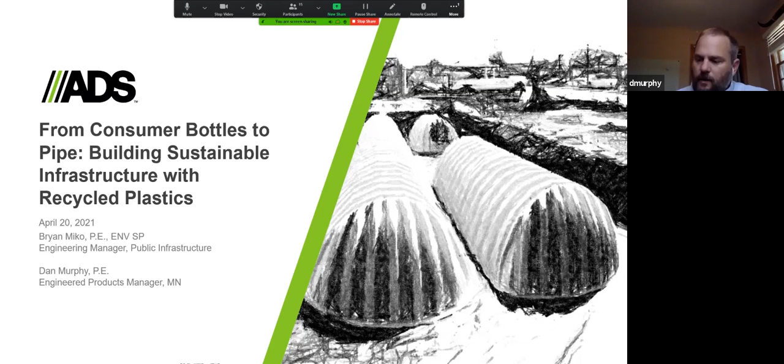I'll let you go ahead, Bryan. Thanks, and good afternoon everybody. My name is Bryan Miko. I'm an engineering manager for ADS. I work alongside Dan, primarily focused in the public infrastructure space and utility space. My background with ADS, I was a regional engineer for 6 years here, really working a lot on the material science side of things with our manufacturing processes, recycling operations, product design, R&D to come up with innovative ideas to use out in the field. I am a civil engineer by trade and licensed in 3 different states, Minnesota not being one of them, but in Illinois, Pennsylvania, and Florida. And I've done quite a lot of stormwater work all across the eastern half of the United States, so a broader perspective from my end. Dan's local to you guys in Minnesota, and he'll bring some specific perspective to the things happening in Minnesota. But I spent quite a lot of time in Rochester and in the Twin Cities and really all across the state of Minnesota, so very familiar with it and glad to be here today.

As Kevin said, our presentation is really going to be 2 parts. The first part is going to talk about some of the things that we've decided to do as a company to be more sustainable from a material source and waste management perspective. Our hope is that you get to learn a little bit about the recycling process for plastics, and learn some things about how sustainable and resilient they can be when it comes to buried infrastructure in the ground. The second part, Dan's going to focus more on stormwater management projects, a few case studies that'll highlight some of the things we can do to be creative with stormwater and how to manage it in our ever-changing climates and environments here in the Midwest. We are really glad to be here today.

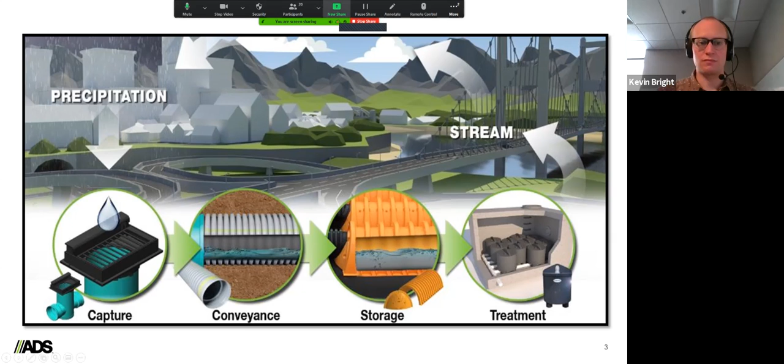Water. It's the most precious natural resource we have. Advanced Drainage Systems is keeping it that way by preserving this precious natural resource for generations to come.

Water. It's the most precious natural resource we have. Advanced Drainage Systems is keeping it that way by preserving this precious natural resource for generations to come. Our industry-leading suite of sustainable water management products is highly engineered and continuously improved to solve for the entire life cycle of a raindrop: capturing, conveying, storing, and treating. As the second largest plastic recycling company in North America, we keep more than 550 million pounds of plastic out of landfills each year, transforming everyday household items into pioneering products that last for decades. We believe in getting the job done right today for a cleaner, greener tomorrow.

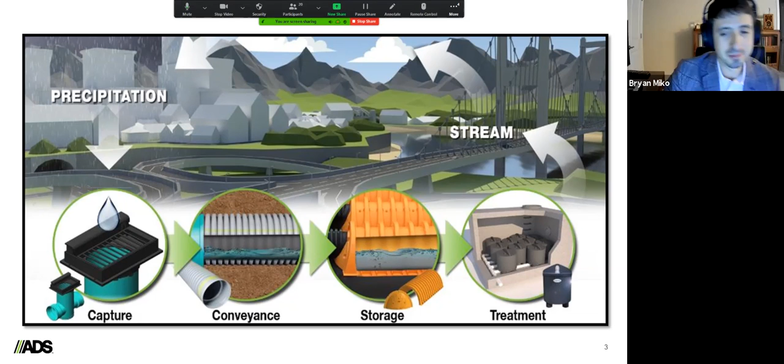Have I returned to PowerPoint here? Yes, you have, Bryan. Okay, thank you.

Now that you have the big picture in mind, I wanted to shift more towards why ADS uses plastics for sustainable infrastructure and drainage investments, and how we incorporate the sustainable use of those materials into what we do. This definition on the screen comes directly out of an inspection document from AASHTO, the American Association of State Highway and Transportation Officials, who came up with a new inspection guide for looking at drainage infrastructure, culverts, and storm sewers.

One of the critical things our drainage infrastructure does is protect our pavements, bridges, curbs, and homes from the destructive forces of water. If we didn't have drainage infrastructure, water would go wherever it wanted, finding the path of least resistance. It would erode soil away and devastate the very system we rely on to get to the destination medical center, through the city of Rochester, and really all of our cities and communities across the country.

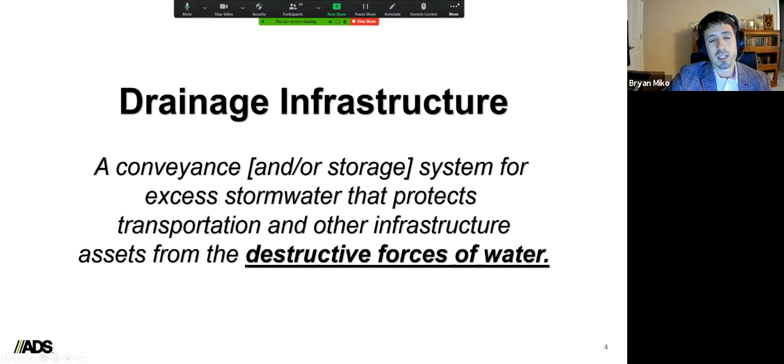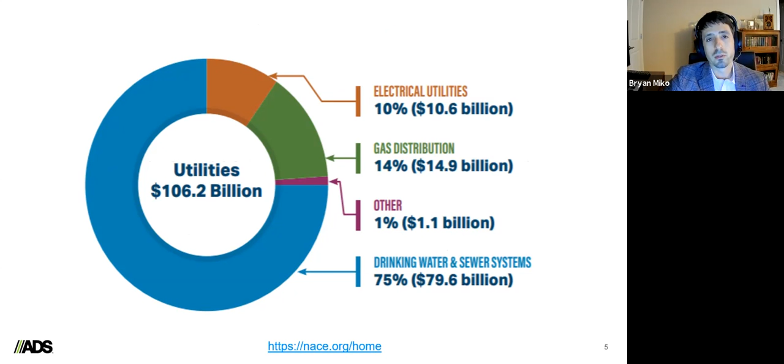Historically, our drainage infrastructure has been made with things like concrete and steel, and still is today. But we're starting to shift more towards the use of inert materials, materials that don't interact with their environment, for buried utilities like electrical, gas, drinking water, and sewer systems, because a lot of them, especially our aging infrastructure, are very susceptible to the effects of corrosion. We spend over $100 billion a year fixing problems related to corrosion with our utility infrastructure as a country.

In a more urban environment, we talk about salting agents and brines quite a lot from a sustainability perspective. We use them, almost addicted to them in some senses, to keep our roadways safe for the traveling public. It's not sustainable to have communities where human life is at risk because pavements are icy and crashes happen, but we continue to use a lot of salting agents and chlorides to make them safer.

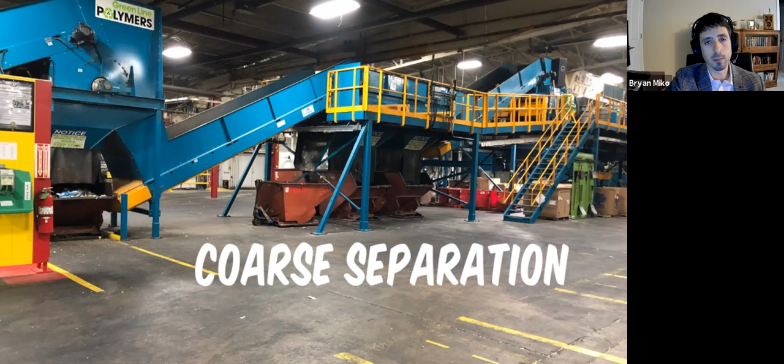The next thing we do is have a sorting team, which ranges in size depending on the facility and throughput. This particular facility is similar to Waterloo - we usually have 8 to 10 line operators on the conveyor system. They're looking down at the different types of packaging, and based on our database of knowledge and their experience, they're picking off packaging that isn't the right type of plastic - not number 2, number 1, or number 5. They throw that into the middle trough, and we keep it separate and dispose of it, either taking it to another facility that can recycle or reuse it, or unfortunately in some cases there's waste generated from that.

Bryan, can you confirm the numbers of plastic that you use? There's a question in the chat.

Sure. So we recycle number 1, which is PET, number 2 plastics, which is HDPE - that's the most reprocessable plastic, actually. You'll see in a lot of what we use, probably 400 million of the 550 million pounds is number 2 plastics. Then there's number 5 plastics, or polypropylene. Those are the three most reprocessable, recyclable plastics.

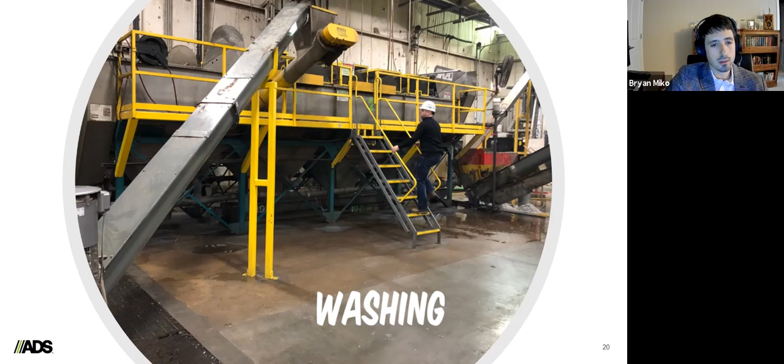...a conveyor system that squeezes out the water and actually dries out a lot of the labeling and additional contaminants, which is what you see here on the left.

On the right is what I was referring to before when I said the word flake. That's what that ground up flake looks like when we chop up the bottles and after a series of wash cycles. We usually do 2 to 3 wash cycles before it gets to this stage.

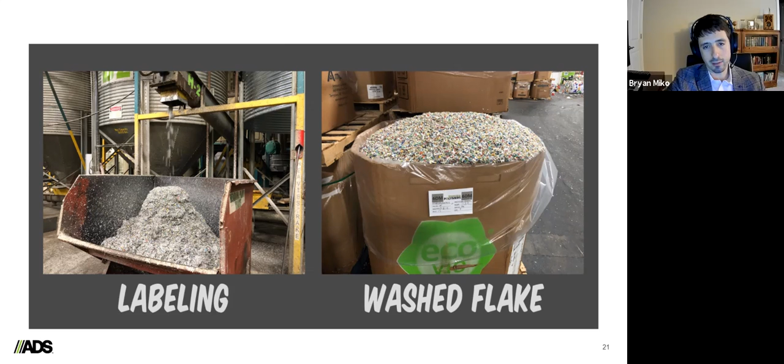I wish I could zoom in a little bit for you there, but you can kind of get a sense. Those Gaylord boxes are about 3 feet high, 3 by 3 by 3 if they were a cube. So you can see all the boxes we have staged throughout the facility behind it, and that's all recycled, washed flake and HDPE plastics.

The last critical component to making these reusable is drying them. Moisture can be very, very dangerous to the mechanical and engineering properties of plastics for future use. This is probably the slowest and most energy intensive component of our recycling process.

It's just because water is a stubborn resource and a stubborn molecule. So getting things completely dry for reuse is critical.

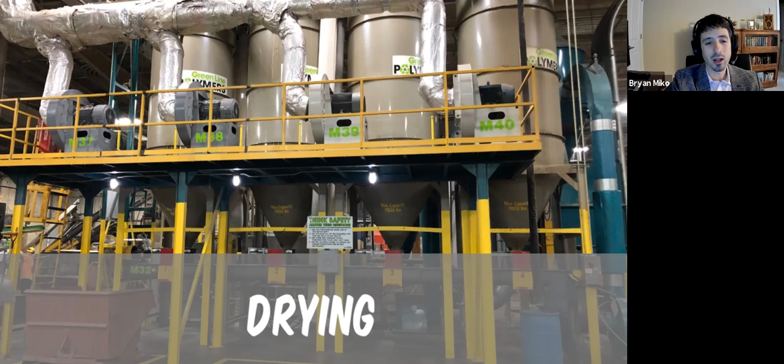After we dry that flake and make it clean and ready to go, we actually take one more step, and this is kind of a self-inflicted decision. What we found is that in using recycled plastics for manufacturing, it's actually good to do one quick melt filtration system to do one final check on the plastic before we put it into our manufacturing devices and extruders.

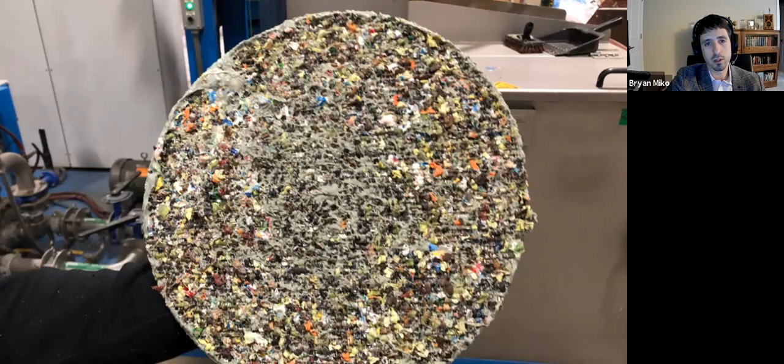So what you're seeing on the screen is actually little pellets, which I'll show in a bit, where we melt all of that flake you saw. We chop it up, extrude it, and chop it into little round pellets that kind of look like BBs. This is what one of the screens looks like at the end of one of these melt filtration devices we use to chop up and reprocess the plastic one more time before doing quality checks.

You can see that when we add this additional step, all of these contaminants were still in that bale of washed flake.

When we manufacture products, we have screens like this that catch this stuff, but it's a lot better to catch this offline before you're actually manufacturing the product, so we don't have to shut down our machine or operations, and we can keep moving and using the recycled plastic at a high output. That's an internal decision we've made, taking this step offline and doing it ahead of time.

We do a lot of quality checks on our recycled plastics. We have a database of over 2,000 different types of packaging that's come through our facility, and we do individual testing on Tropicana's orange juice bottles, Heinz's mustard bottles, and Tide's detergent. I'm using big brand names people recognize, but you can imagine the variety and variability that comes through. Every time a line operator sees a new piece of packaging, we take that and try to quantify the material properties of this plastic and how to incorporate that into our system.

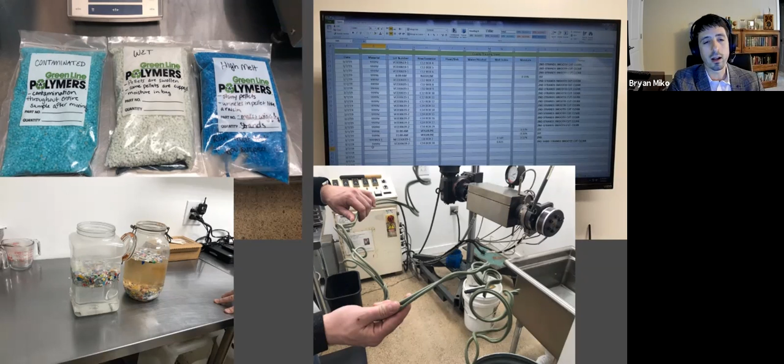We do all sorts of quality checks, like in the bottom left, what we call a float test. The far left bottle is what you'd see in the wash baths, with just water and plastics—that's the mechanism we use to clean them. On the right, we change the density of that fluid by mixing alcohol and water together, and what you see is a separation of different types of plastics. That gives us a good sense of how well we pulled out number 5 plastics from number 2 plastics, and we can use a different density fluid to quantify how we're doing from a processing perspective.

We take all of those pellets, send them out to our manufacturing facilities, and use that recycled material, that recycled waste, to develop and create buried infrastructure products for stormwater management and wastewater management. We do a lot of septic systems, rural wastewater treatment systems, sanitary sewer systems, et cetera.

There's been a ton of research, and I don't have a lot of time here—I want to leave some time for Dan—but AASHTO and national research arms like the Transportation Research Board and National Cooperative Highway Research Program have done a lot of research on the use of recycled plastics for engineering applications like culverts or storm sewers. Very recently, they have allowed the use of recycled plastics in manufacturing for use within the public right of way and on public projects by departments of transportation, cities, et cetera, with an assurance that the material will last 100 years plus.

The cool part of this story is that we're fortunate to be part of an initiative where we take things only meant to last 6 months to a year, and we repurpose them to last 100 years plus when buried in the ground, serving a purpose in handling and managing our stormwater.

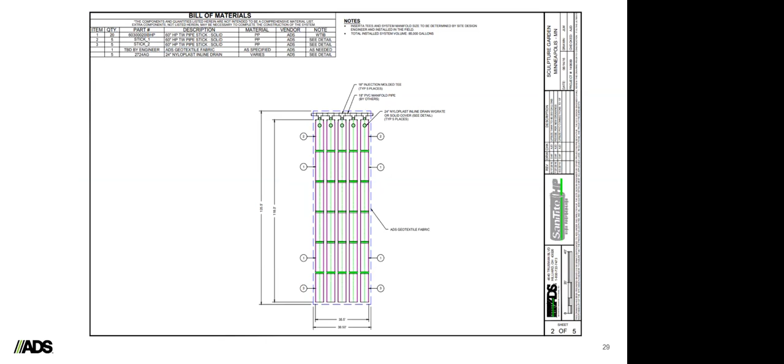So by installing, yep. Say that again, Bryan. Sorry, I was just going to say, I was wondering if you had another visual. Go ahead, I do, yeah.

We were able to give the repumped groundwater, used for aesthetic purposes, a secondary use: irrigating the grounds that were being irrigated anyway with potable city water. So not only are we saving water, but we're alleviating pressure in the storm sewer system, because most of the water is now taken up by evapotranspiration after it's applied via irrigation, instead of entering the city's pipes and flowing back out to the Mississippi River.

In the grand scheme of this project and all the improvements at the Walker Art Center, this particular piece represented a minor or small cost, but it resulted in a major improvement in the system's sustainability.

So in general, I like this project example because I think it serves as a good reminder that there are opportunities all around you to improve sustainability, and you really do need to try to make positive changes where and when you can with the means you have available.

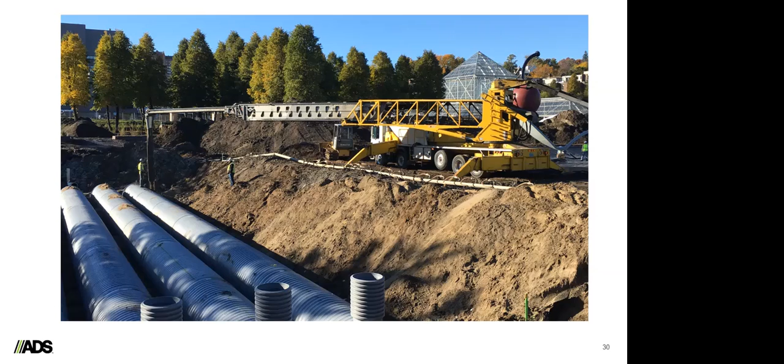Before I talk about the second project, which represents more of a typical case in terms of what we're implementing day-to-day, I want to touch briefly and broadly on the regulations we're working with, that have been in Minnesota in particular, promulgated down from the Clean Water Act, passed federally back in the 1970s.

In general, on new development projects throughout the state, we have to ensure a handful of major requirements are met. The first is stormwater rate control: proposed rates of runoff from a site must meet existing rates. The intention is to control the impact of increased impervious surfaces on both the existing built infrastructure around us, the roads, sidewalks, buildings, as well as the need to protect naturally occurring downstream conveyances like rivers and streams.

When we add impervious surfaces, we increase the rate of runoff, or how fast water runs off a site. That can lead to overtaxed conveyance systems and upstream flooding, downstream erosion in streams and lakes, and increased sedimentation and decreased water quality as an end result.

The second major requirement is volume control. It's related to rate control, but with more focus on the erosive effects of increasing overall flow volumes on downstream water bodies. Whereas rate control focuses on how fast water runs off a site, volume control focuses on how much total water runs off a site.

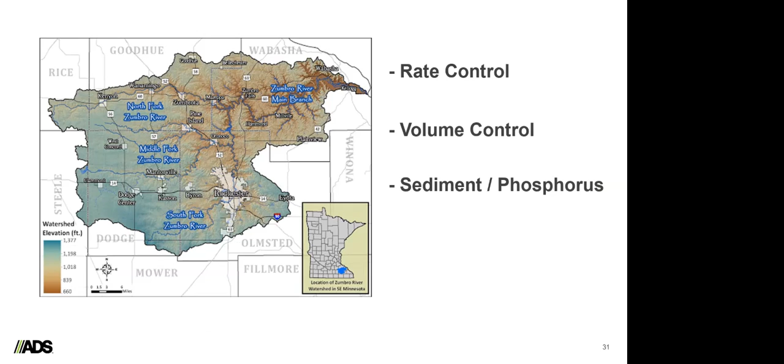Overall, what we're trying to do with these regulations is counteract the detrimental effects of adding increased impervious surfaces by treating the water, trying to infiltrate it, and generally keeping it where it falls rather than piping it away as fast as possible.

As you'll see, these regulations have allowed for continued economic development within our state without sacrificing the sustainability of our water resources. We probably can't perfectly accomplish that sustainability piece, but we continue to make improvements. We try things, and if they don't work, we keep moving on, continuing to study and collaborate with regulators, policymakers, owners, and developers to improve the way we're managing stormwater.

For a long time, developers and engineers used the standard stormwater pond to try to meet different regulations within Minnesota in terms of managing stormwater. What you're doing with the pond is capturing the runoff from your site, slowing it down, allowing the suspended sediments in the water to settle out, and providing storage so you can more slowly release the water and help with rate control regulation. But these weren't a perfect solution, even though they were put in by the thousands through the 90s and early 2000s.

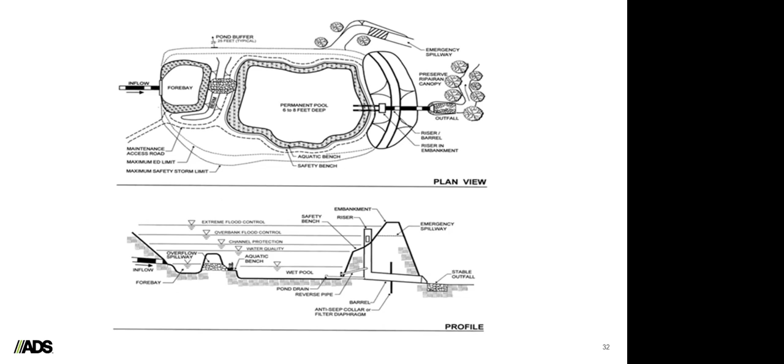You can advance the slide, Bryan. Thanks. We have one question in the chat too. Yeah, go ahead, Shane, would you like to go ahead? I do have another meeting at the top of the hour, but if you're near the end, I can hold it. No, go ahead, you're fine.

Okay, I'll keep this very brief but condensed. First, I'll introduce myself. Hello everyone, and thank you. My name is Shane Kirpata, and my pronouns are he, him, they. Rochester is my hometown, which I care about deeply, but I currently reside in Berkeley, California, where I'm a public works commissioner and vice chair of the planning commission for the city of Berkeley. I'm also a summer lecturer in the College of Environmental Design at UC Berkeley and a government and institutional facilities master planner in my day-to-day work. I should mention I'm speaking on my own behalf today.

I'm a little concerned about the choice to use plastic for multiple reasons, especially when you're talking about infrastructure that is out of sight and too often out of mind. I'm curious what the degradation of these recycled plastics might be over a 100-year duration, what the maintenance costs might be, when these might need to be replaced, and what chemical leaching might occur that will ultimately end up in our open waterways. I'm also concerned about the grooves in these pipes and how freeze and thaw in Minnesota might impact maintenance, and whether these can be recycled again after use. It's worth noting that 1970s legislation and policies aren't up to date, so we might need to think 50 years into the future rather than uphold the status quo of 50 years ago. I'm not trying to discourage anyone, but I do have concerns whether this is the best route for our shared future and the future of our children. Thank you.

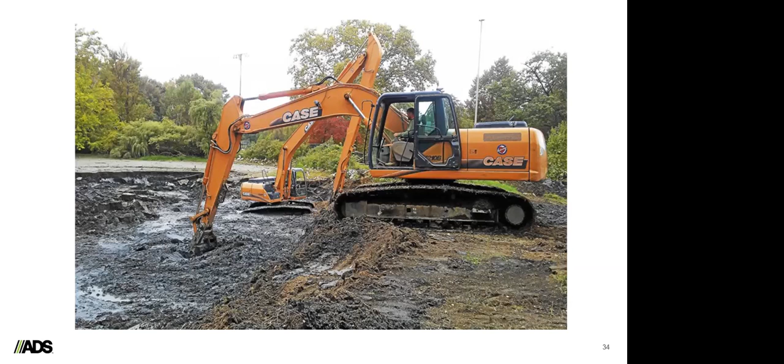This is an example of a pond dredging project and what you have to deal with after you fill up a pond with sediment. It's not a pretty sight. It's very disturbing to the surrounding activities that are going on, and it turns out to be pretty expensive and costly.

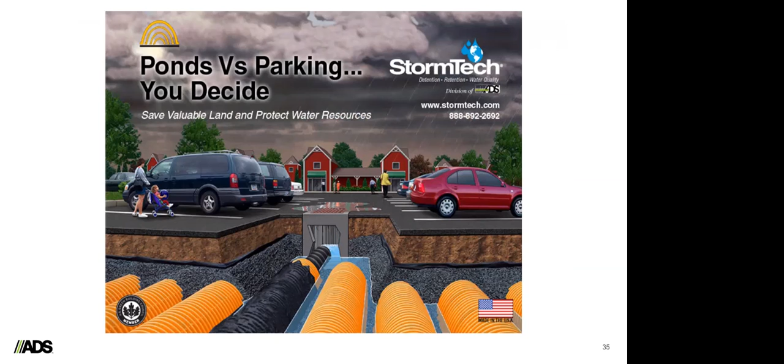The idea to move stormwater ponds underground came about probably in the early 2000s in Minnesota, with the idea that we needed to provide volume control aside from just rate control and water quality removal requirements. That was to try to get water underground and allow it to filter back into the soil rather than just store it on the surface.

I'd add that when thinking about climate change in general, storing stormwater under the surface is potentially beneficial, as you're not allowing it to heat up via solar radiation all day long. In areas in southeastern Minnesota where you have trout streams to deal with, and you're worried about dissolved oxygen levels and keeping those streams cool, this idea of storing water underground and not letting it heat up may become important.

I was just going to run through an example of a project we're working on currently and how stormwater is being managed in a typical situation. Not making any claims that this is the perfect way to do it or the best way, but I wanted to show you how it's being done, and comparing it to the do-nothing approach or even putting a stormwater pond on site, it may have certain advantages.

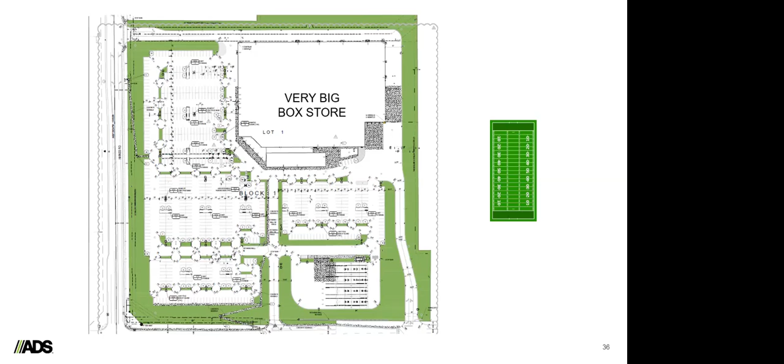In this case, to do stormwater management on site without sacrificing land area to a stormwater pond, the designers and the owners elected to put things underground. We end up with two very large underground infiltration systems that allow us to capture water, recharge it back into the groundwater, as well as provide storage for rate control.

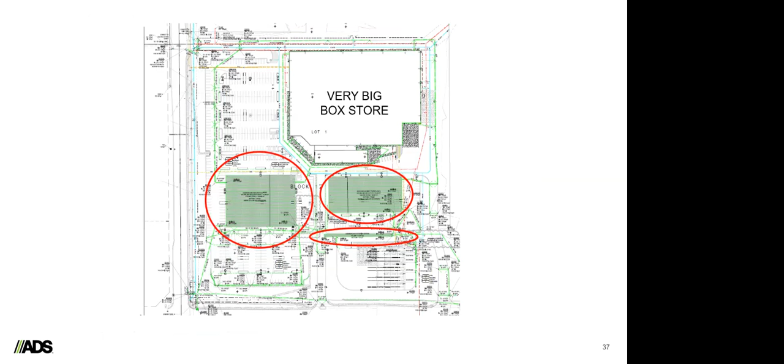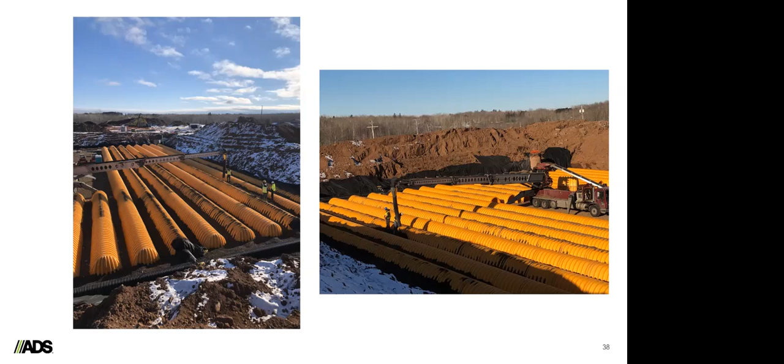Let me make one quick statement on maintenance. Compared to a pond, where you have to take a big operation every 20 or 30 years and dredge it out with heavy equipment, in this case we're directing all the flow to a single row of chambers. If you look at the pictures in the far back corner, you can see those access structures where we'd actually clean those structures out every year at a minimal cost if you finance it over the long term, versus one big lump sum project that takes the whole summer to clean out a stormwater pond.

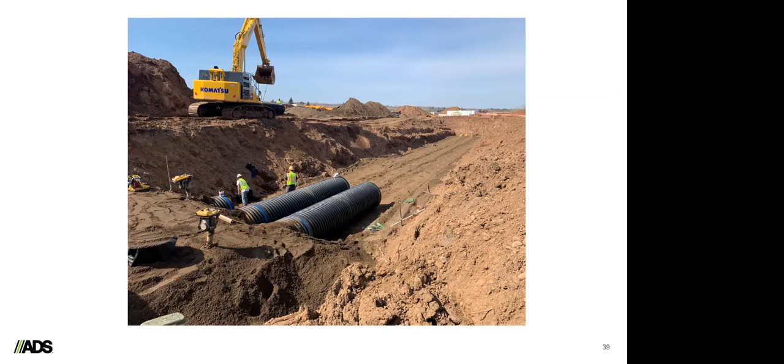That's all I have on those specific projects. Apologize for the rapid pace there at the end. I guess we can open up to questions if anyone wants to hang out.